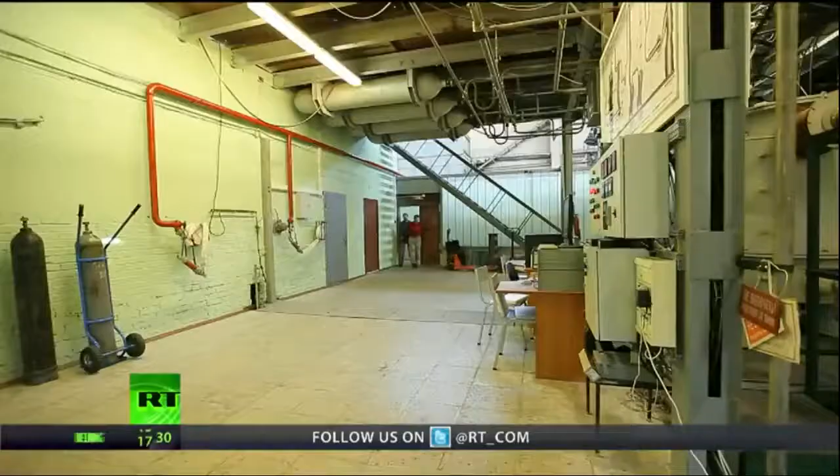The Institute for Electrophysics and Electric Power is headed by Philipp Rutberg. He was awarded the USSR State Prize, the State Prize of the Russian Federation, and others that would take too long to list for his work in the field of electrophysics and low-temperature plasma. And for well over 20 years, he's been working on a revolutionary waste disposal system.

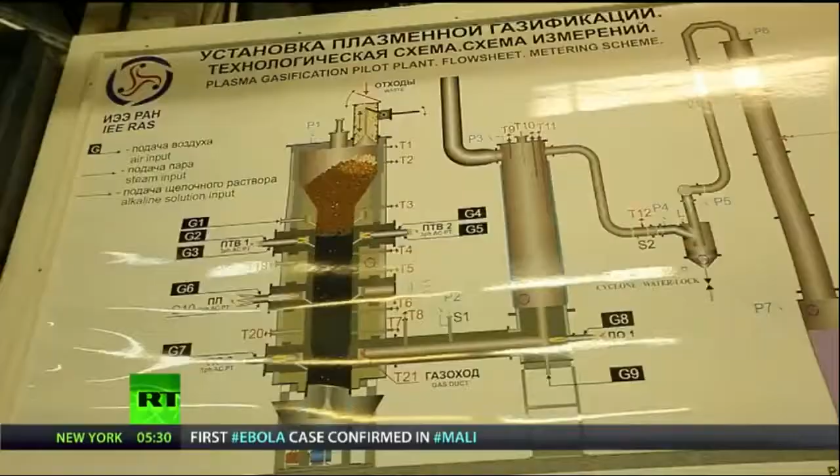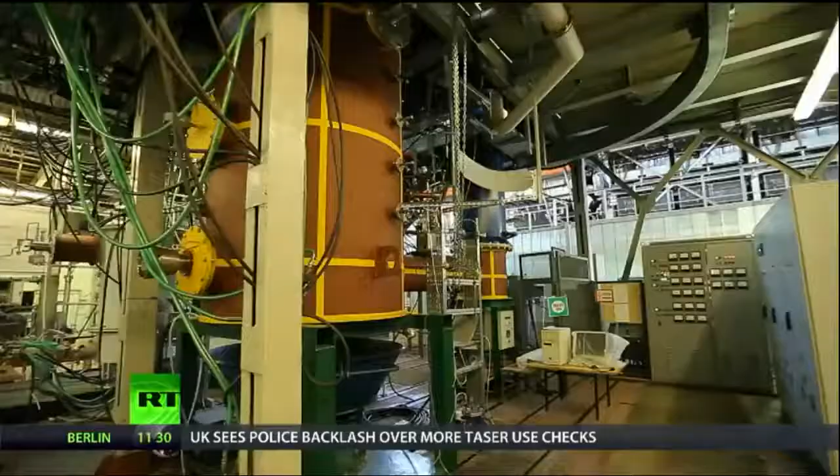Not only does it cleanly and safely destroy the most common types of rubbish, it actually generates green energy from it. The installation uses plasma gasification technology to break down organic matter into synthesis gas, a combination of hydrogen and carbon monoxide, which can be used to generate heat, electricity, or further processed to produce liquid fuel. Although it's not likely to replace nuclear power, oil or gas anytime soon, the green machine has found its niche.

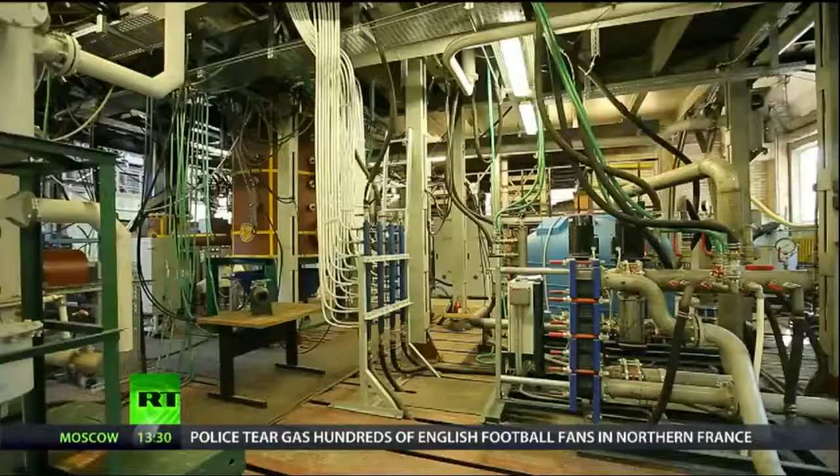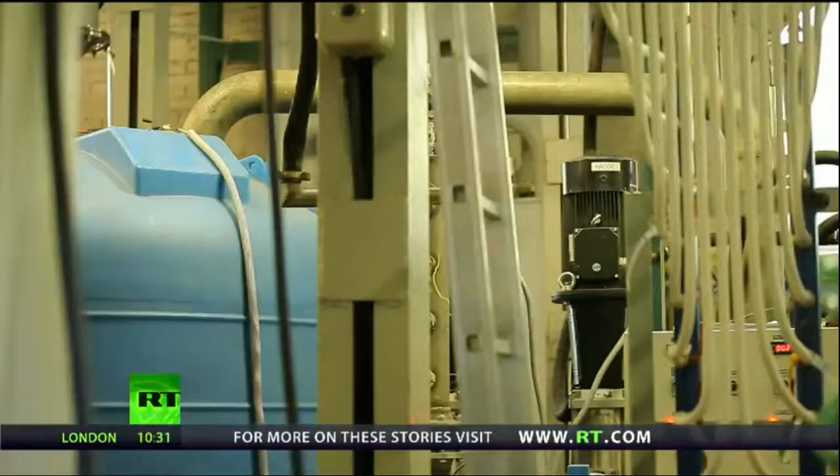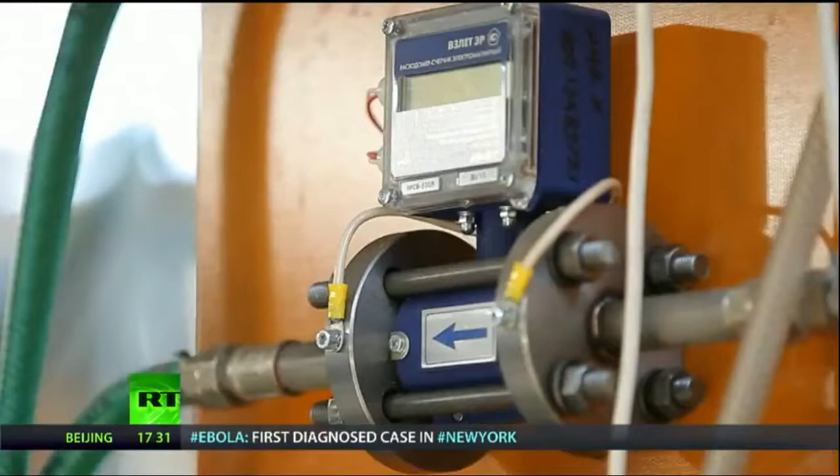Back in 1990, we stopped researching the fundamental issues of physics and began thinking of possible new applications. And since we dealt with plasma, which, thanks to its properties, is capable of breaking down any substance into atoms, thus opening up the possibility to further rearrange them, we decided that the most promising application would be to develop ways of treating highly toxic waste, such as polychlorinated biphenyls, binary gases, medical waste, and so on, all with the purpose of neutralizing them.

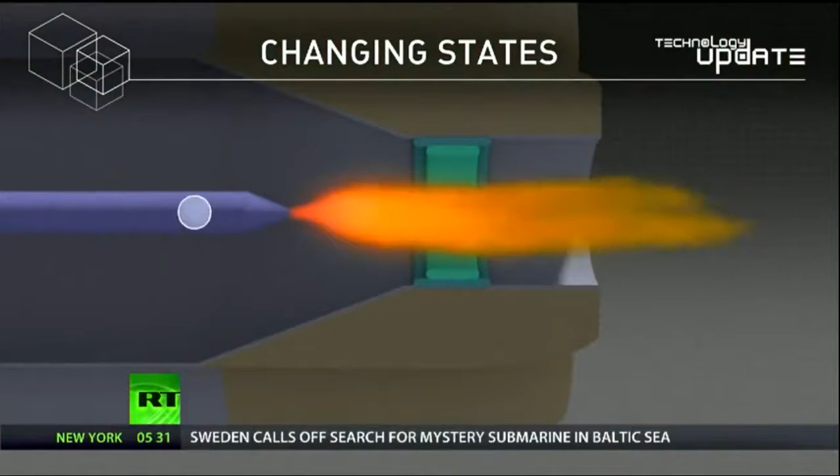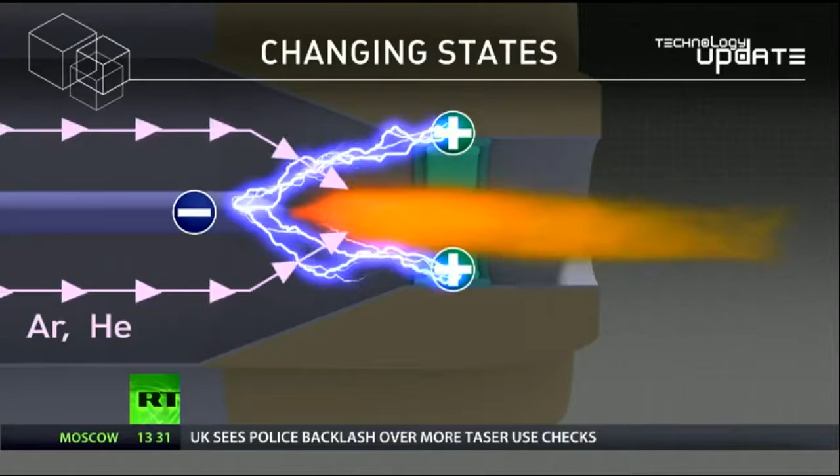Plasma is the so-called fourth state of matter. It forms when air or gas is ionized, which basically means it consists of equal numbers of positively and negatively charged ions. And to produce it, you'll need a plasma torch. The space-age device comprises several electrodes through which a high-voltage, strong electric current passes, forming an arc. Highly pressurized gas, which can be anything from argon, helium, hydrogen to the air we breathe, then shoots through the arc, throwing out plasma of up to tens of thousands of degrees. But all that aside, it also looks pretty cool.

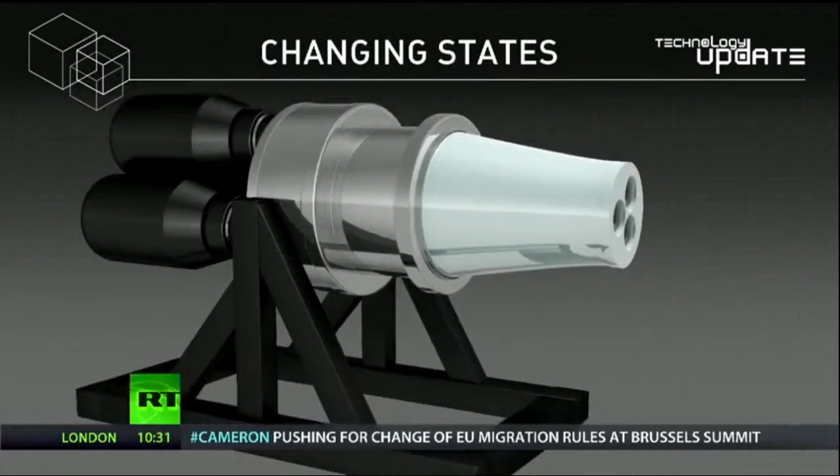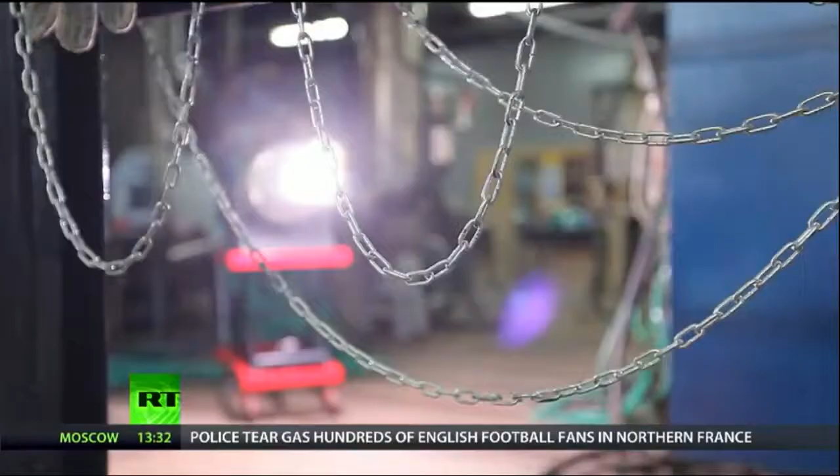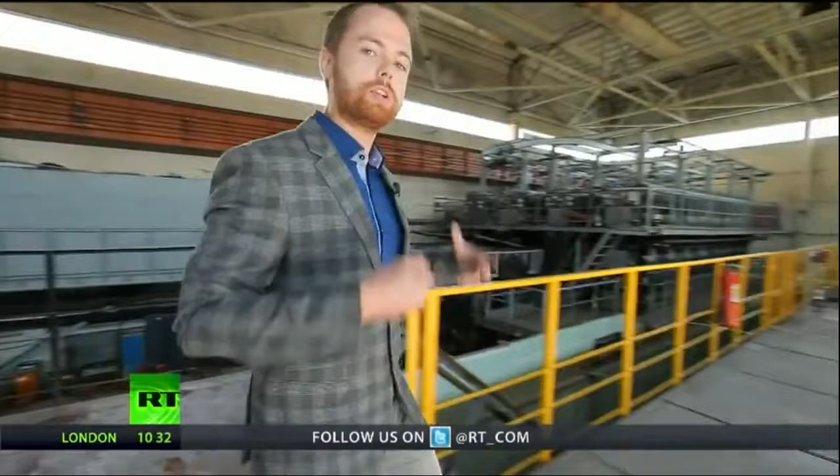By boosting the voltage and lowering the current, the Institute has extended their torch lifespan to well over 1,000 hours, while projecting the 250 centimeter arcs outside the nozzle increases heat transfer to whatever's in the chamber. The best fuels for the plasma waste processor are these wood chips and sawdust briquettes from the logging industry. But it also works pretty well with household waste, which has to be dried and shredded first to boost the efficiency of the process.

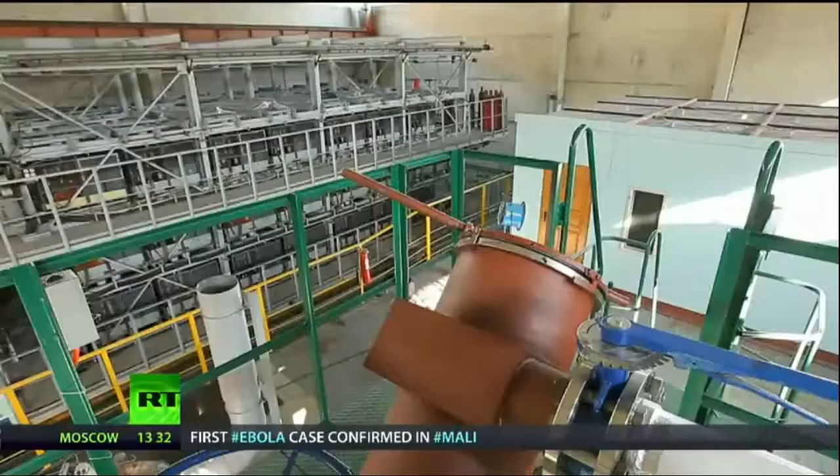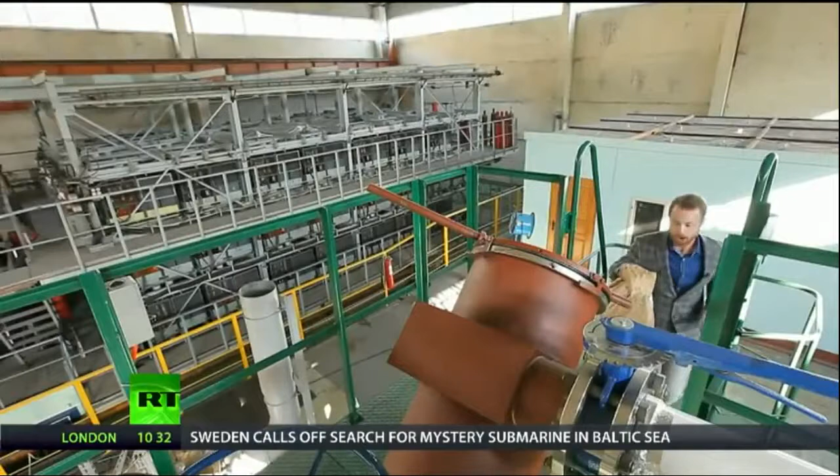Each kilogram of waste can produce up to 1.5 kilowatt hours of electric power. So that means I'm carrying about 22 kilowatt hours, which is enough to fuel the average household for a day. There are other ways of producing power from waste, such as biodecomposition, which uses heat or bacteria to produce gas, but they're nowhere near as effective. However, before we can produce any clean energy from this waste, we must first blast it with 10,000 degrees C hot plasma. So let's fire it up.

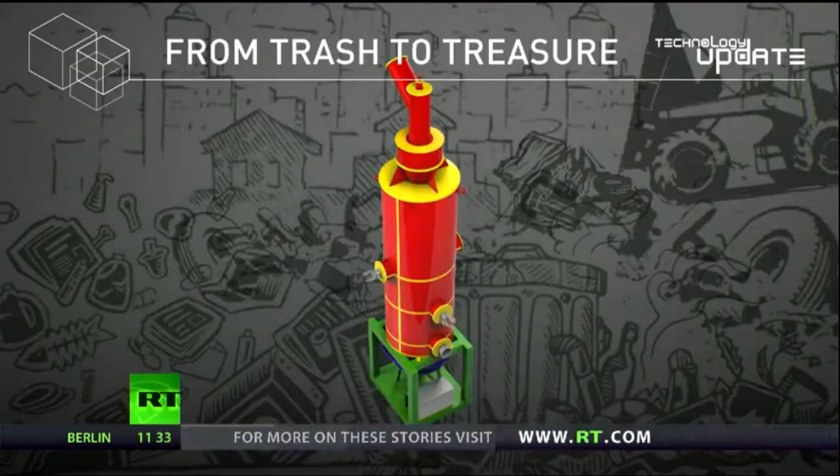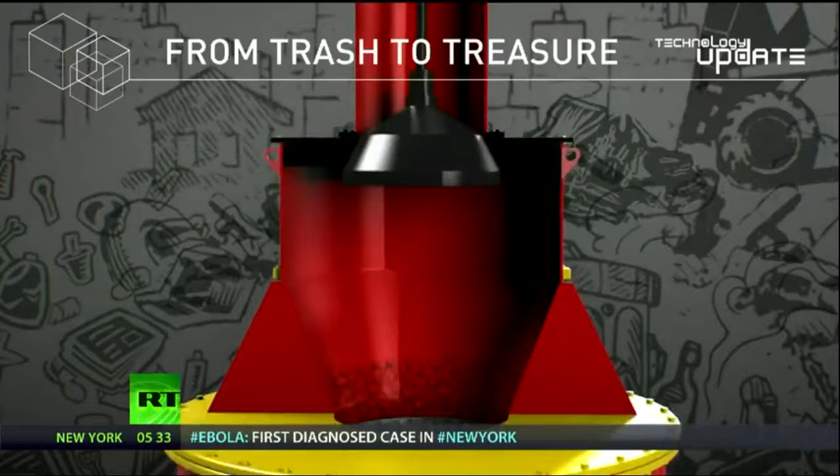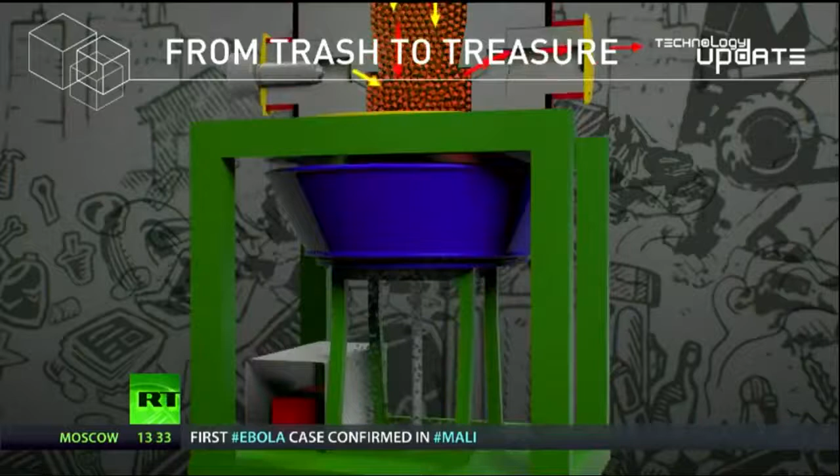To kick the process off, the dried household waste is loaded into the lock chamber before falling through in batches to the transfer bin and finally the reactor chamber. 3 plasma torches ensure the waste is evenly heated, melted and ultimately vaporized, where the molecular bonds between atoms are destroyed, breaking them down into their component elements. Any slag produced is siphoned off at the bottom, the amount of oxygen is carefully controlled, and the synthesis gas produced at the other end is quickly cooled to prevent dioxins from forming.

We've achieved some good results while researching the physics of the process. We made some discoveries. Some of them are now included in school textbooks and published in scientific journals. Also, we developed a new kind of plasma torch, the AC plasma torch, which I've already mentioned. It's interesting that basically we're the only ones working with alternating current, although Westinghouse and others did research it too. But we seem to have cracked it.

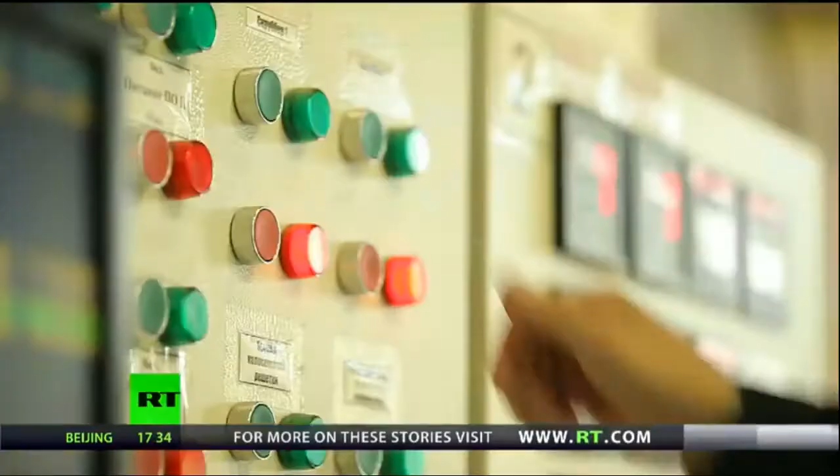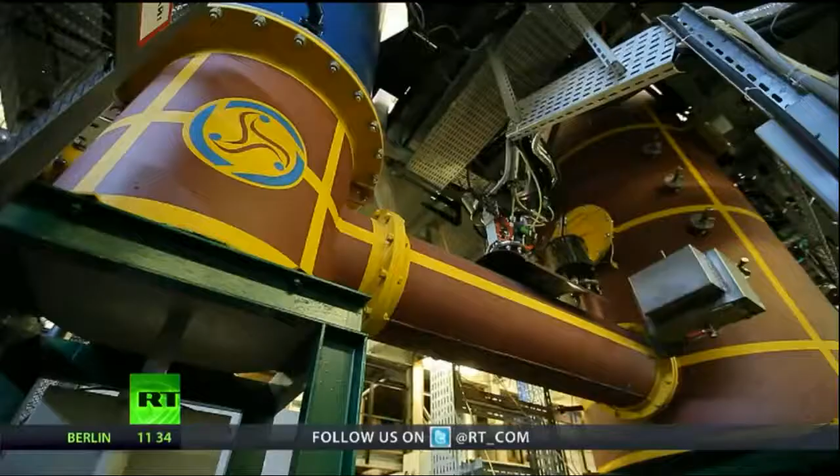The challenges of creating powerful plasma torches that work on alternating current were by far outweighed by their advantages over direct current. AC torches are not only significantly cheaper, not requiring complex power conversion blocks, but also highly energy efficient and can generate multiple arcs, with the Institute managing to convert up to 95% of the heat from the electrical input to the gas. So as it turns out, one man's waste really is another man's treasure.